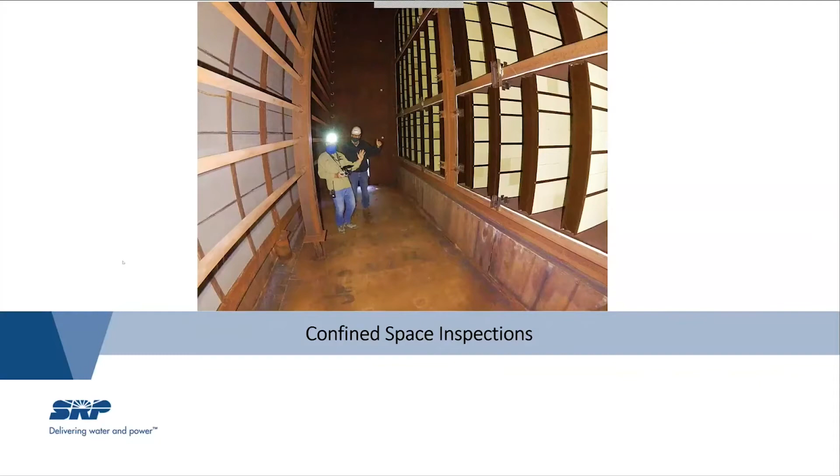So I am your presenter, my name is Chuck Devaney. I am a senior UAS pilot, and I manage the UAS program here at Salt River Project in Phoenix, Arizona.

I also sit on the remote sensing committee at SRP. I graduated from grad school at University of Hawaii in Manoa, in geography. I focused more on geospatial technologies, so more GIS, remote sensing, photogrammetry.

My UAS experience includes a lot of humanitarian assistance and disaster response in hurricanes. I've done a lot of coastal monitoring while I was going to school in Hawaii, especially grad school. Did some vegetation management, I still do, for our group here. Did some Department of Defense work, cinematography for ABC 20/20, and also for our media group here, and then survey and mapping, of course, and then a lot of stuff around energy.

So the agenda for today is we'll talk about who is SRP, and we'll talk about the business units who utilize the Flight Services UAS program. And then we'll talk about the use of UAS in confined and enclosed space inspections at SRP, and an exciting new use case for us around the use of UAS for inspection.

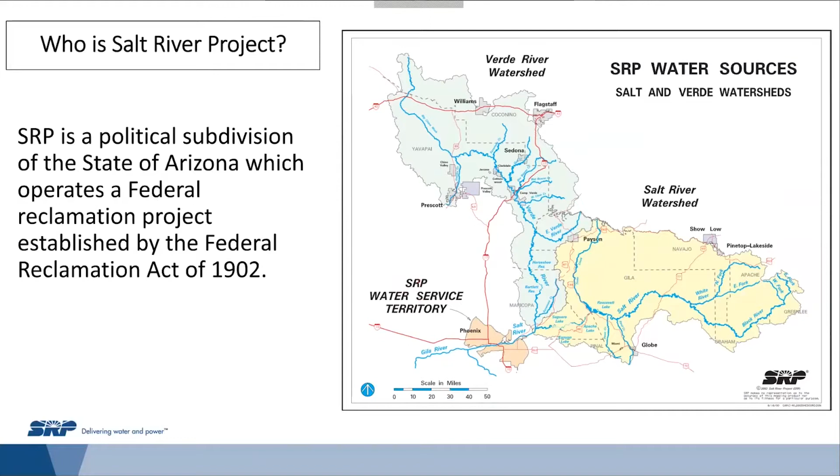So business units that utilize UAS at SRP: first one being survey, next one GIS cartography, our generation departments, distribution, maintenance, transmission, substation engineering, creative services, our water resources group, vegetation management, our fuels group, which manages a lot of our coal assets and others, and then our mechanical construction and maintenance department.

So each one of these has its own use case. Some of them are similar, some of them share the same equipment and deliverables, others have more tailored solutions and equipment to go along with that. So the SRP UAS program is a subsidiary of Flight Services. We also have a couple helicopters and a business jet.

So some of the confined and enclosed space inspections that we do at SRP at this point in time: we do underground electrical vaults, we do HRSGs, which are heat recovery steam generators, we do boiler furnaces, we do penstocks, and also water storage tanks.

So the water storage tanks is actually done by ROV. The electrical vaults, well, we'll get into that in a couple slides here, I'll tell you a little bit how we actually go about doing that. And then HRSG and boiler furnaces, I don't believe that as far as industries go is anything new. It's relatively new to us, but it's definitely given us a whole new perspective on how we are able to view the conditions of our gas assets.

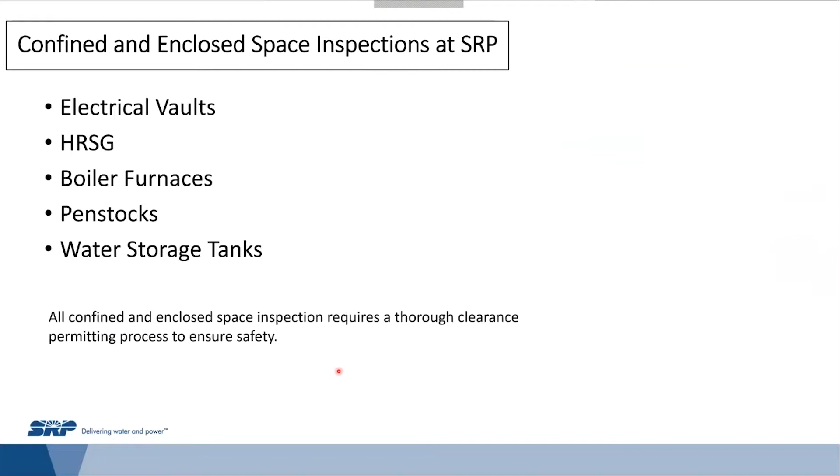So an inspection process overview. It usually includes an outage, so the asset is not powered up and you can actually access it. They pull off the hatches to access different modules, say for a HRSG or a boiler furnace. And the air quality is monitored for a period of time.

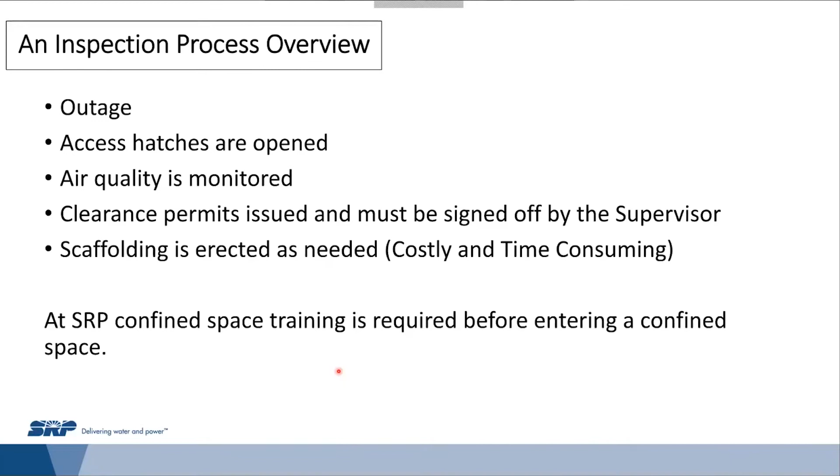Once they give an all clear to enter the asset, clearance permits are issued and must be signed off by the supervisor. And then if needed, and usually is, to get eyes on, especially something over 70 feet tall, they have to erect scaffolding, which takes a lot of time and costs a lot of money, and of course they have to take it back out. That just compounds the cost and time factor. And confined space training is required before entering any confined space.

Let's talk a little bit about some of our assets that we use for collecting information for inspection. We mentioned that we do water tank inspections for our potable water tanks for different locations that we have throughout the valley and outside of the valley as well.

We have a Deep Trekker Revolution. This has an onboard sonar, high resolution camera, and some laser pointers. We use this to determine the amount of sediment that might be building up in any of our water tanks. We also use them for the trash racks and the tail race trash racks for our hydroelectric facilities, to see how much sediment is being built up against those trash racks, or if there's any debris from trees that can end up in the lake and subsequently against our trash rack. We can even do some removal with the claw.

It might not be exactly a confined space inspection as you might see in a lot of different utilities around, but I thought I would make mention of it anyway, and it's a really neat tool.

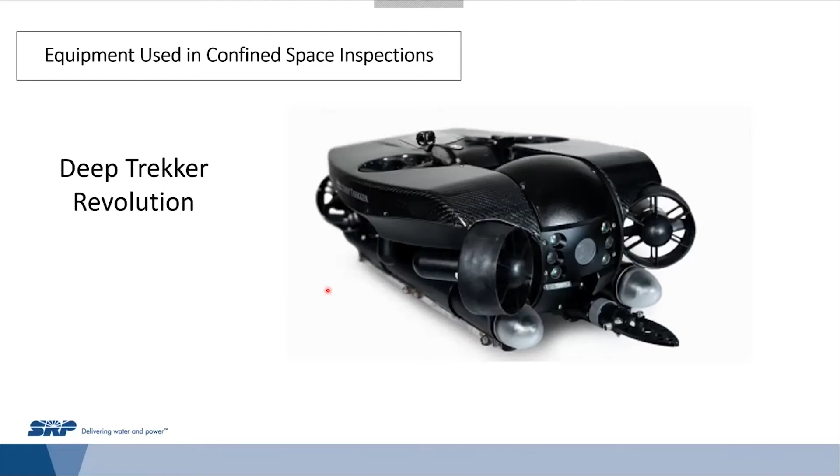Other equipment that we use for confined space inspections, we do have a DJI Mavic 2 Enterprise Dual. So the distribution group approached me and said, we would like to be able to access our underground electrical vaults while energized to do an inspection.

So I thought about it and I said, well, probably not a good idea to put an asset such as a drone in an underground confined space while it's energized. I mean, what could possibly go wrong with that?

So I said, hey, instead of actually flying the thing, why don't we build a bracket, put it around the Mavic 2, and we'll put it on the end of a hot stick, and that should be able to get you the information that you need for your inspection.

So we brought in our safety group. We brought in a bunch of different engineers and said, here, let's give this a go. Let us know if it works out. So we did, and it turns out that it worked out.

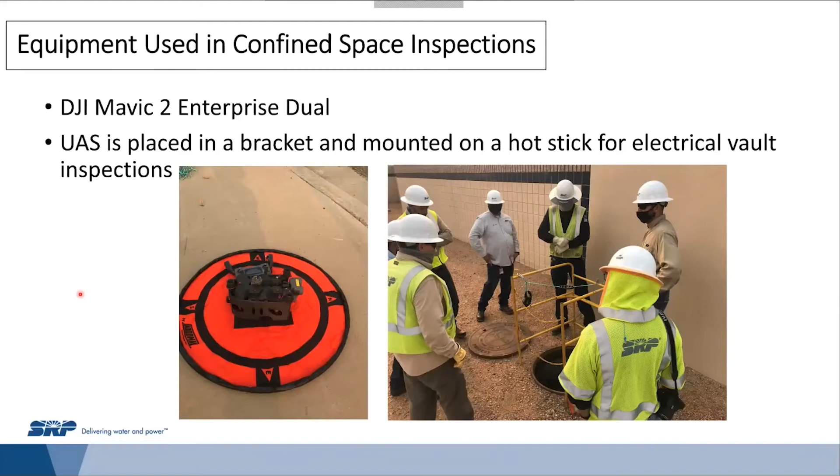So we didn't actually have to fly it to gather the information. Instead, we just had it on the end of the stick, and we still utilized the lights, the camera, and the thermal sensor, and we were able to get them all the information they needed to give our underground vaults a clean bill of health. So I guess you don't always have to fly these things to utilize them.

And then, more of our flagship underground, or actually confined space unit, is the Flyability Elios 2. This is a collision tolerant UAS designed to go into confined spaces in a GPS denied environment. It's relatively stable once it gets locked on to features such as the wall of a boiler or a HRSG.

And we enter the HRSG module, myself and an engineer. I pilot it. It's really, really difficult to pilot by looking at the unit, you actually have to fly it by the screen. We fly it to the top, and we've established a workflow where we can quickly check the condition of each module of, say, a HRSG, in a lot less time than it would take to bring in a scaffolding team and set it up and do it that way.

Gresco offers these. Gresco worked with us to allow us to try the unit out before we purchased it. We really appreciate Gresco for that.

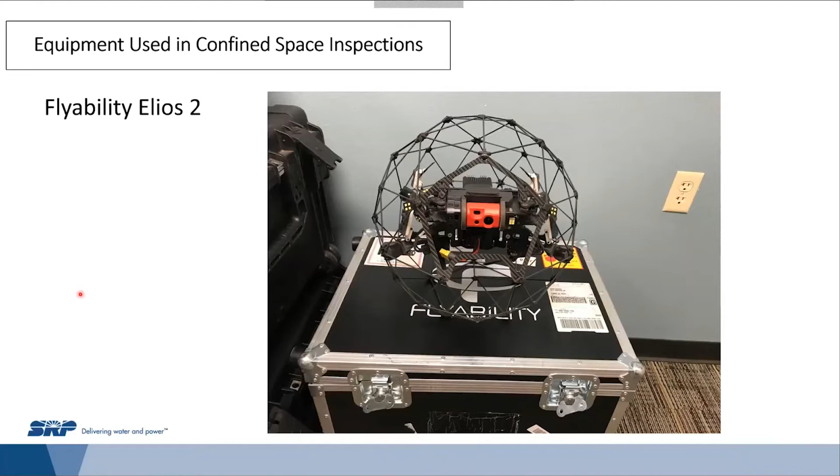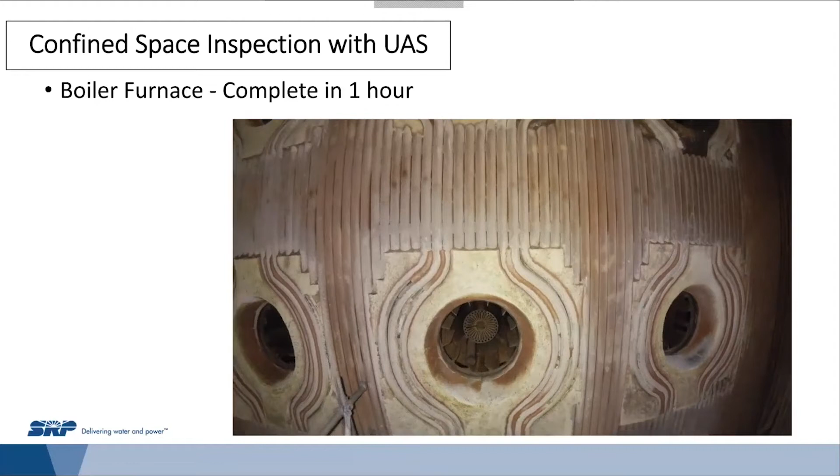This is probably the second half of what we were looking at. You get about 6 or 7 minutes out of a flight, so it took us roughly... we were in and out of there in about an hour. Usually it takes, well, it's hard to say. It could be anywhere from 2 to 3 days once you do all the scaffolding, get that in and out of there.

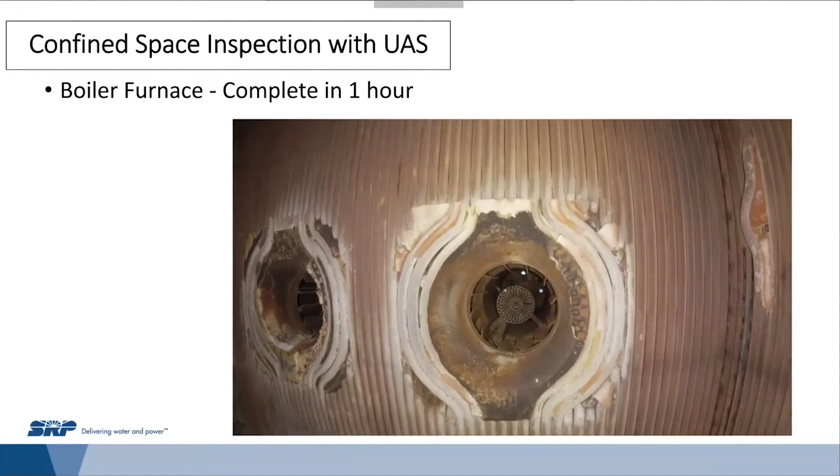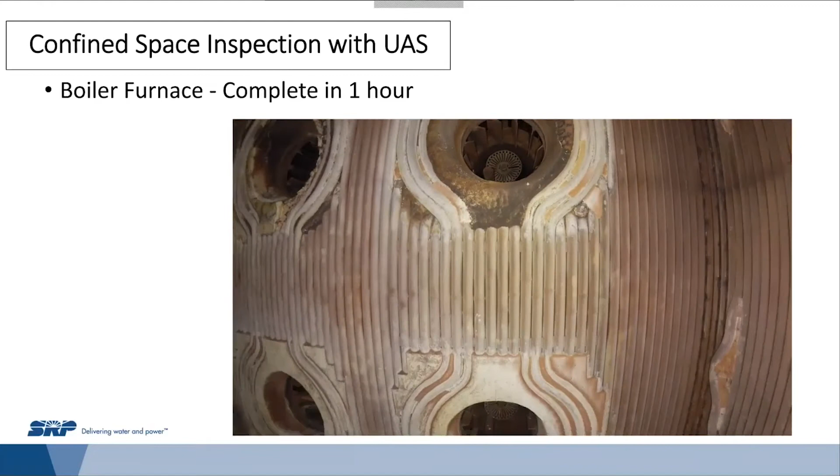We were able to get everything that we needed in about an hour. So we went through about 7 batteries in order to get this done. It took a little bit of time to kind of establish an approach to how we were going to fly it, what the field of view was going to be. It wasn't always an hour, but that's about how long it takes us to do it now that we've streamlined the process, at least for us.

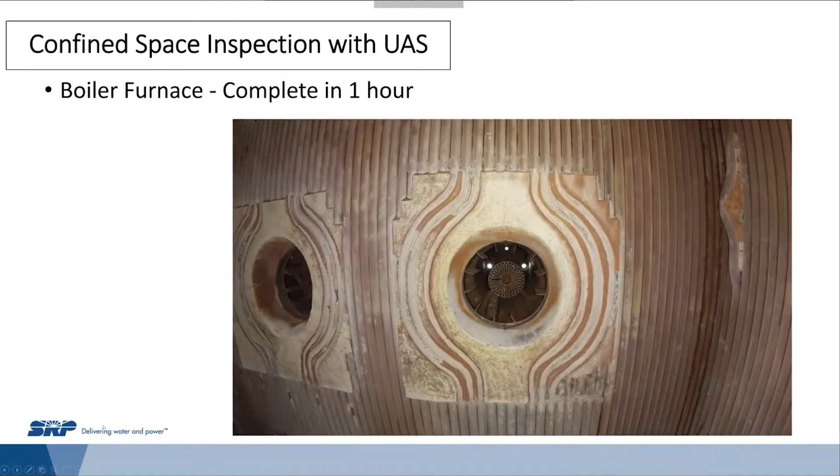So I'll go ahead and pause that, move on to the next one, which is our HRSGs. I'll play that video for you. So this is somewhere between the CO catalyst and the ammonia injection grid.

So I reached out to an engineer and said, hey, I'm going to be doing this presentation. I know how you guys were doing it before, but I didn't really understand how long it would take and how much time and money you're saving. We weren't able to actually quantify that yet because it's still relatively new to us, and it just kind of depends on the situation and what you're able to identify from the ground. I'll go ahead and summarize what he had sent back to me.

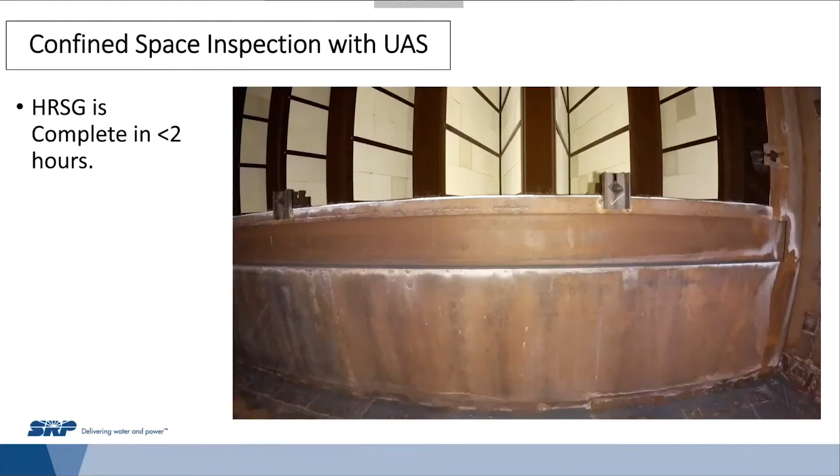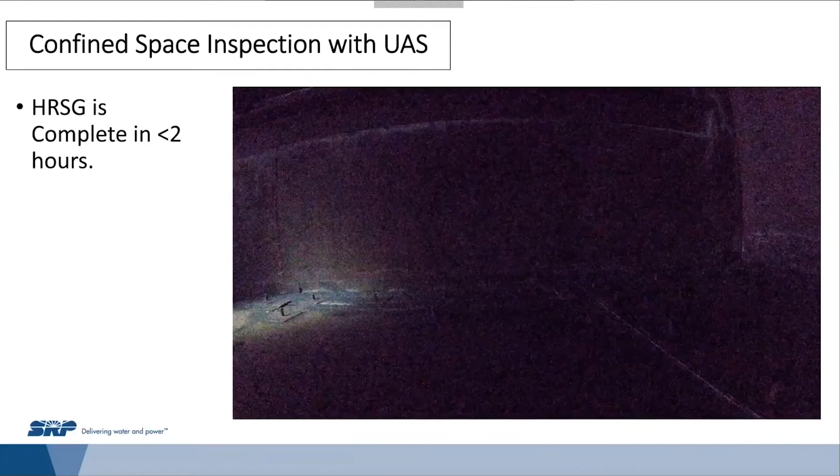So obviously the benefit to the UAS is not having to set up the scaffold in the boiler furnace or areas inside the HRSG. That's definitely a bonus there. If we see an issue from the scaffolding or from the videos, then obviously they've got to go in and deal with it, so you still have to set up the scaffolding, but you're not flying blind. You have an idea of what it is you have to deal with before you get up there.

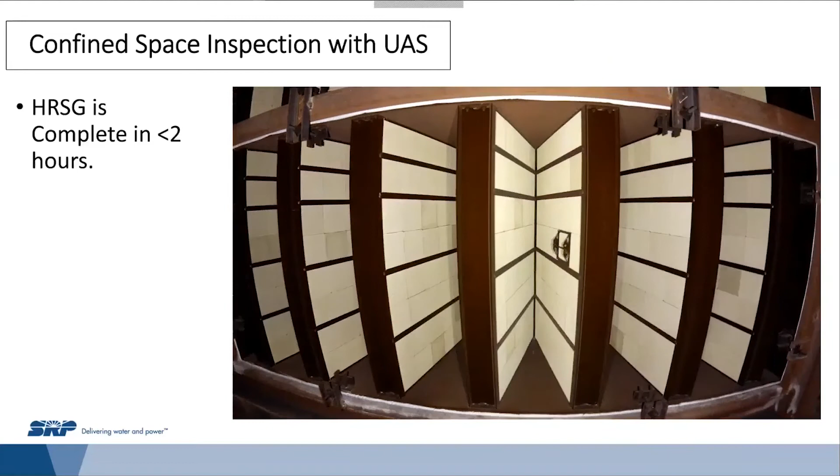Normally they would be on the ground and can only really see up about 70 feet, so whatever you can see in 70 feet is what you can see. That's not probably the best approach because the bottom 70 feet may not represent well the other, in some cases, 60 or 50 feet of structure above it. So it definitely saves money, it definitely saves time, but we don't really have any hard numbers as to how much time it saves. It would probably save anywhere from 2 to 3 days if you don't have to send up any scaffolding.

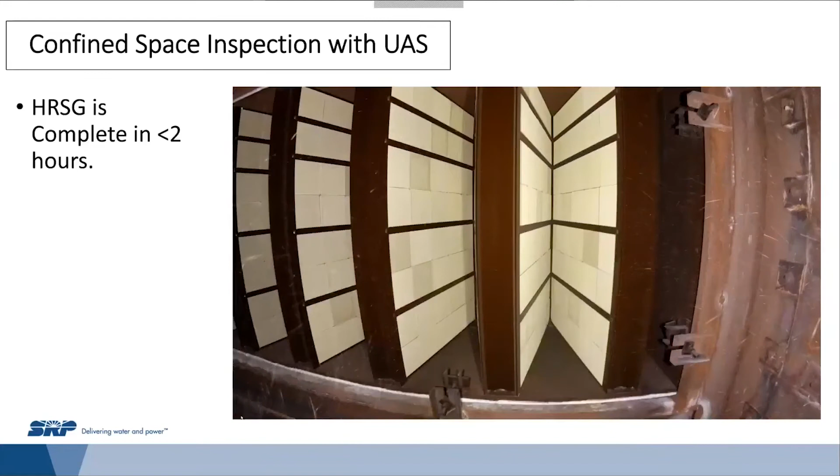So we have a special use case where we utilize this UAS to go inside of a hydroelectric dam and actually do an inspection of one of our penstocks. For those who may not know, a penstock has an inlet gate from the water side or reservoir side of the dam that opens up. The water goes through there, down the penstock, and then to the turbine that spins and creates power, or in some cases can be reversed to bring water back up to the reservoir. We do have 2 units at 2 separate hydro facilities that have that capability.

Every 12 months, an interior inspection of a penstock at one of our hydroelectric facilities is performed. A scaffolding contractor installs a special type of scaffolding, which takes about a day, day and a half, and it takes about the same time to take it back out. So you already have 2, maybe 3 days of just scaffolding construction and takedown. Once the scaffolding is installed, you send in the inspection team once they're cleared, they climb the scaffolding and perform the inspection. All of this is very costly and time consuming, so it just adds to the outage and the things you could be working on.

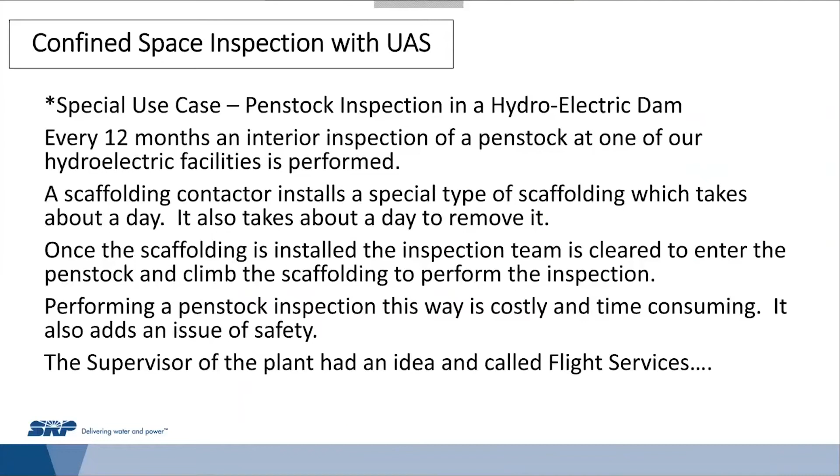The interior of this penstock was relined with carbon fiber because the original one was built in 1926, I believe, and was riveted steel. Over that much time, it's going to fatigue and make leaks. So they brought in a contractor to put in this lining, which has a warranty, so it has to be inspected every 12 months. So we gave it a go, and here's the video.

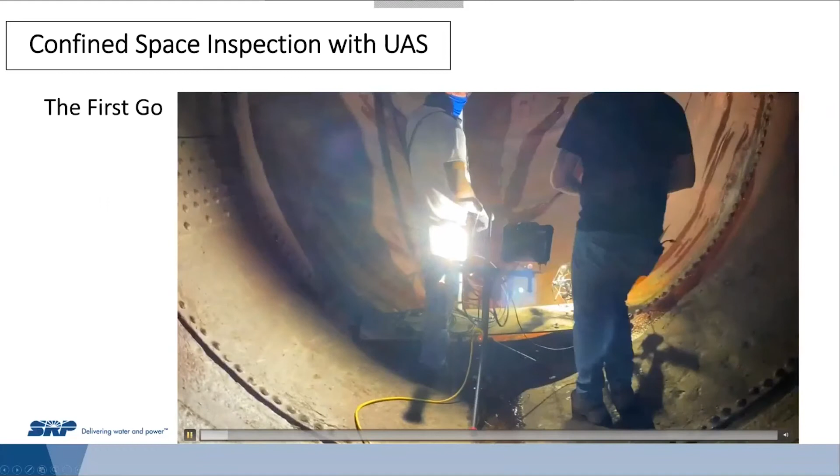So this little platform has a range extender. Jason there is managing the range extender.

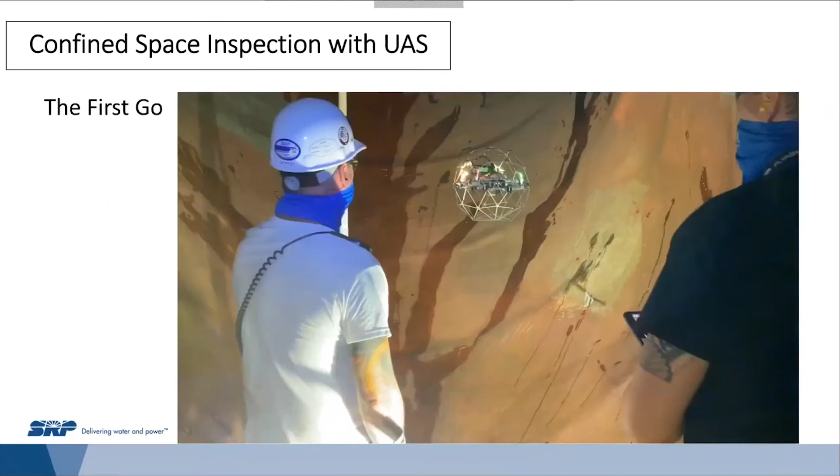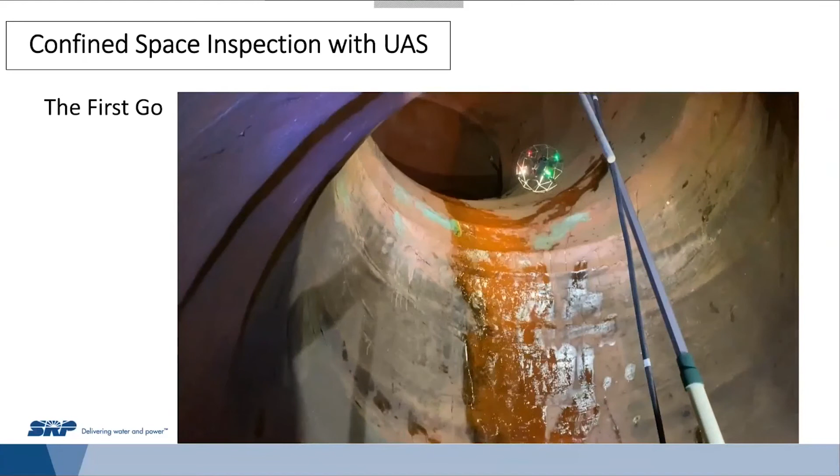We have it on a stick because we were definitely going to be going beyond line of sight, that was not an option. So we wanted to make sure we had good, solid communication with the aircraft throughout the entire flight, because it would be a heck of a deal to have to set up scaffolding just to go get our drone back.

So there it is, the range extender on the end of our hot stick, making its way to its first part, and I'll show you in the next video, of the bifurcation. Somebody's looking over my shoulder, I believe it was actually the inspection engineer who was taking this video.

And the drone, it's gone. It's beyond line of sight.

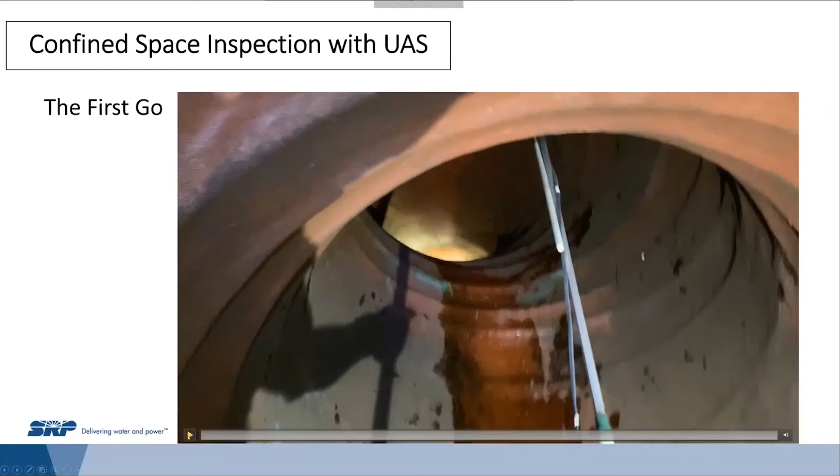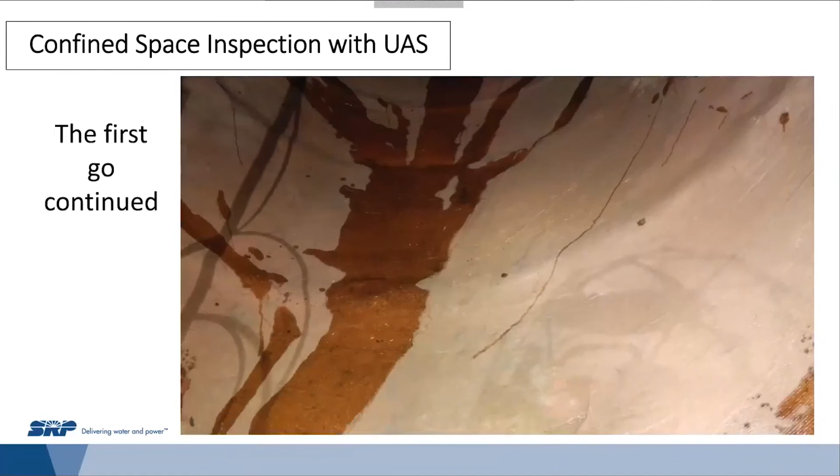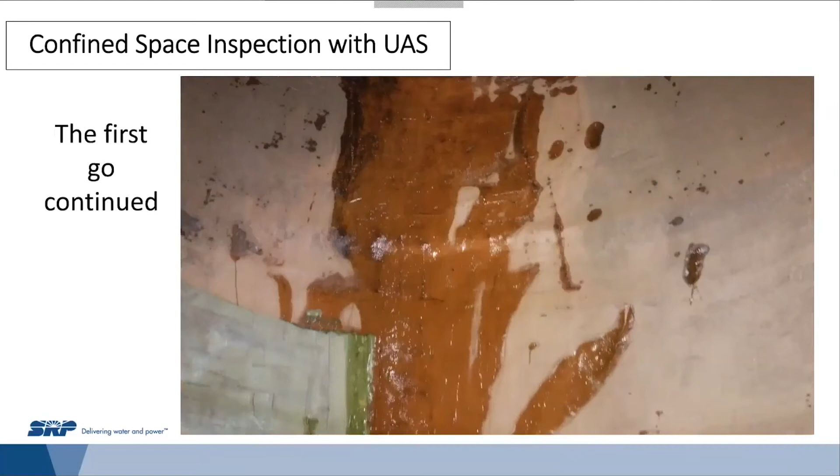So the first go continued here, this is from the UAS perspective. Takes off, and you can see where there have been repairs before. We looked at each one of those once we got up there.

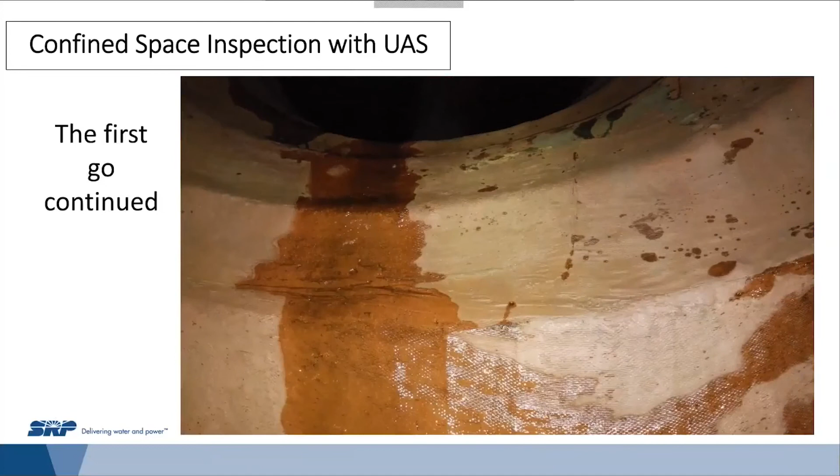Peeking over the crest is about 20 feet tall, 20 to 30 feet tall, and there's always a little bit of seepage, just part of the deal there.

And it peeks over, and there is the bifurcation for the two inlets from the inlet gates. You can see the green there where they've made repairs over the years.

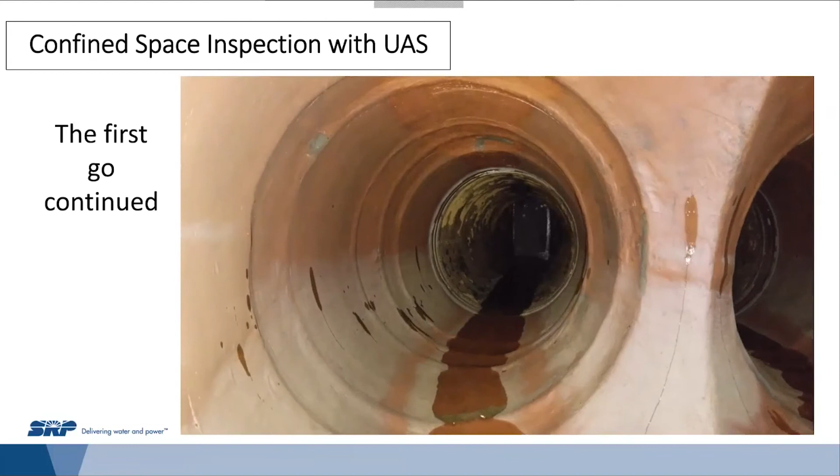I'm sorry, I don't remember when they actually did this repair, not the repairs, but the actual new lining. But a lot of water goes through there, a lot of pressure can create some wear and tear, and this is why it's important to do this inspection.

The engineer looking over my shoulder, the inspector, was determining whether or not any of these things needed to be repaired. And one of the more important things we needed to look at were the seams coming up where you can see the riveted steel.

That's the part that actually goes through the dam. That's the concrete, that's the concrete. There's concrete all around that.

So no repairs were needed, but there's a seam there, and we needed to make sure that seam wasn't delaminating. So we spent some time looking at that seam.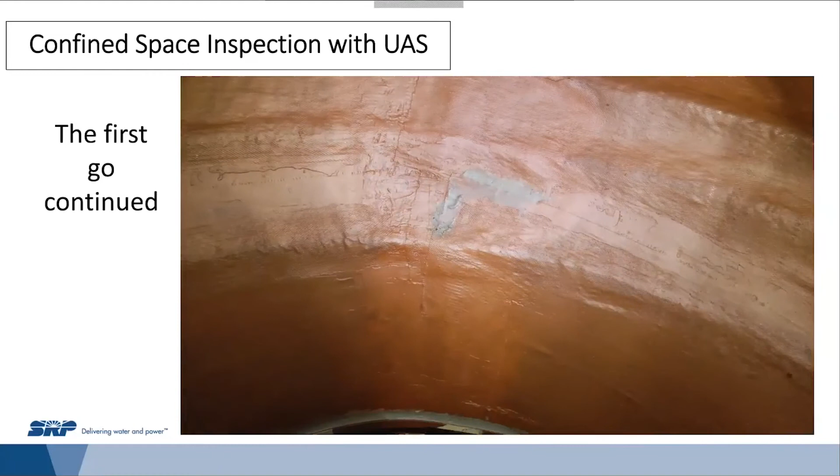And looking up, each one of these bifurcations took one battery, about 7 minutes to do one side, 7 minutes to do the other. Once we got done, we obviously had plenty of time to spare.

We put another battery in, and he said, let's go check the inlet gates. So we went to one inlet gate, which you can see there at the end of the penstock, and inspected it, and then we were able to fly back out of that bifurcation and move to the other side where we looked at the other inlet gate, and we completed that all in one battery.

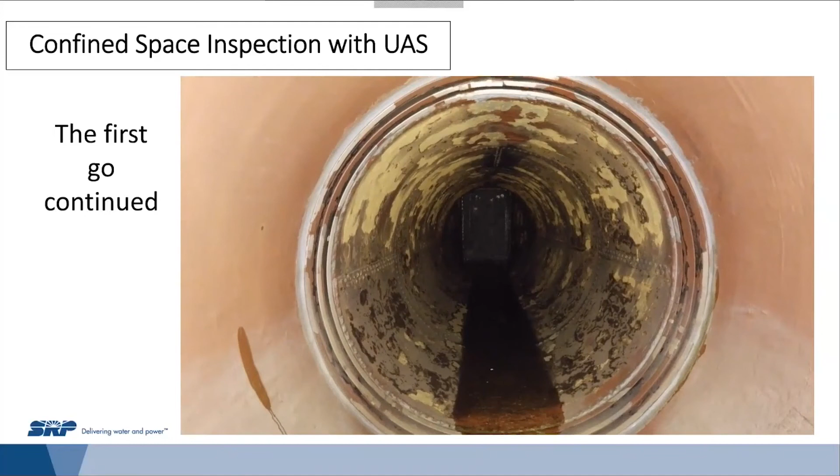So it took about 7 minutes to actually do that. It was beneficial, it worked out really, really well, especially for our first go of it.

Spend some time practicing with it, and you need to do that, for those of you out there that are operating UAS a lot. You're GPS denied, so you're on your toes the entire time you're flying this thing.

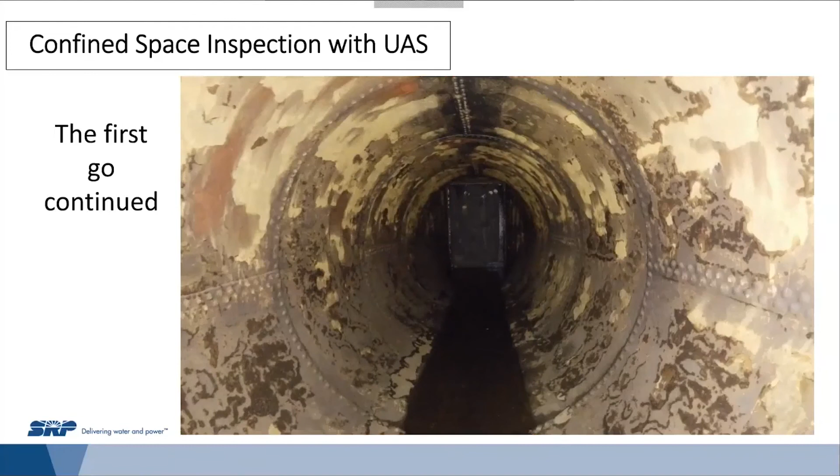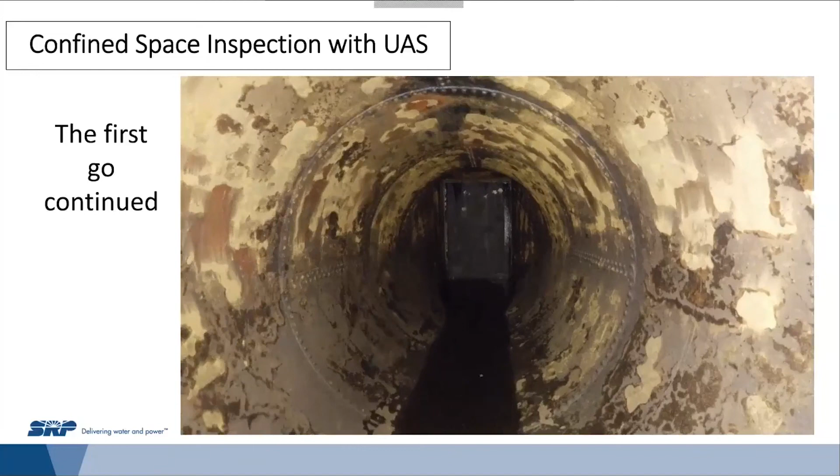So spend a little bit of time somewhere and practice in an environment where you're not going to lose it or get it hung up on something. It is, like I said, collision tolerant, but there are some things to be cautious about as well. You can still definitely break it.

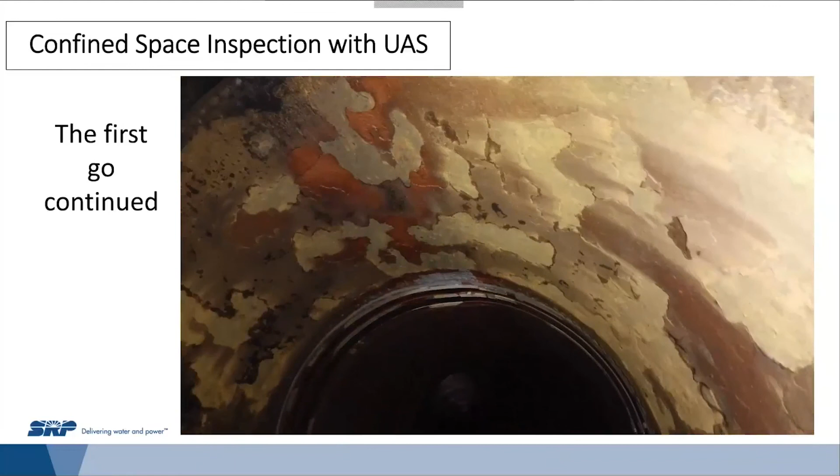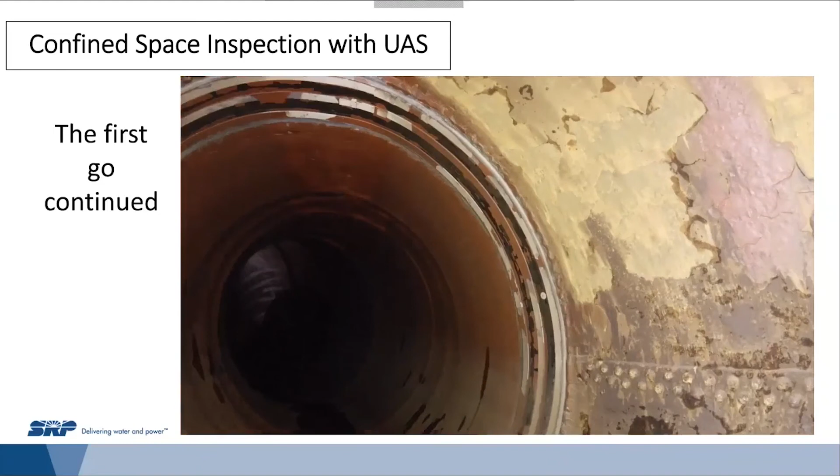So there is looking back at the seam. We were able to determine that the seam on both sides was actually still very tight, no delaminating. And then we could start working our way back to where we took off.

I can go ahead and forward that. There's the other side, same deal.

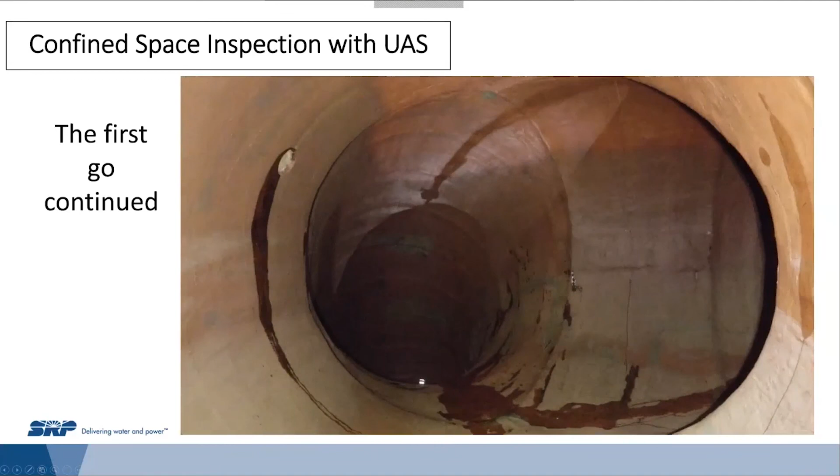Looking back and starting to work our way back down, see the light down at the bottom.

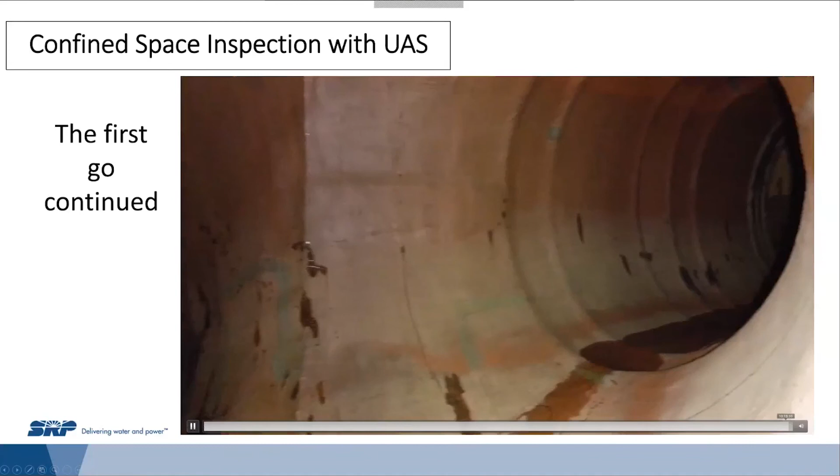And this is edited, so you don't get to see all the bloopers, unfortunately.

So that was the video of the first time we actually flew a penstock inside of a dam, and we've done others, and it's worked out. There's a lot of texture in this penstock, so the drone's able to lock onto that, and it makes the flight a lot more stable.

Some of the other penstocks we have are much bigger and don't have this texture, so it was a little bit harder to fly those. So you just need to be prepared and on your toes.

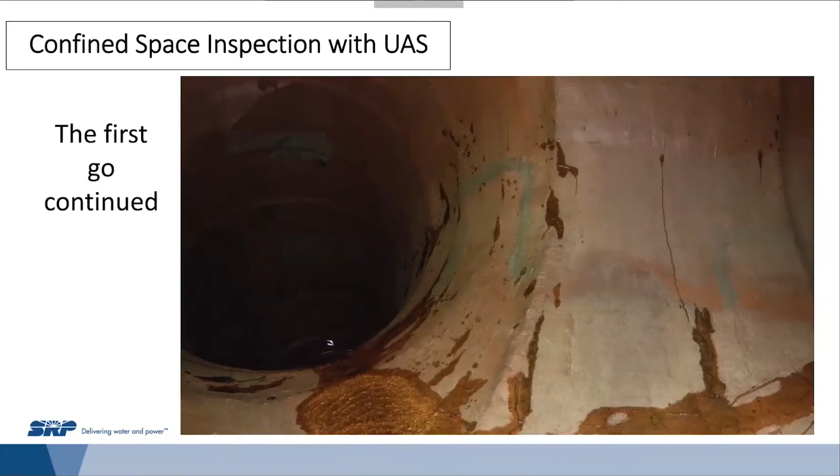So results of the inspection: in less than half a day, the inspectors had enough information to give the penstock a clean bill of health. Using UAS to conduct the inspection saved valuable time and money.

Using UAS for confined space inspections is much safer than previous methods. Obviously, you climb up on a scaffolding, you can risk falling, and there are slip hazards and whatnot.